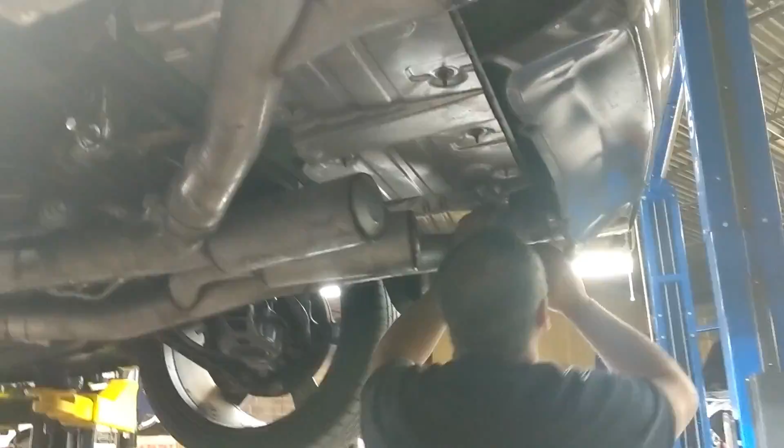So, final piece of the puzzle is the MSD Air Force intake with cam and upgraded heads. Don't focus on me, focus on him. He's talking about important stuff. I'm just moving around. We're going to take a look, see what all comes in the box.

It's a box in a box. The box in the box. I don't think it's in another box. Step one, put your box in a box. Wait.

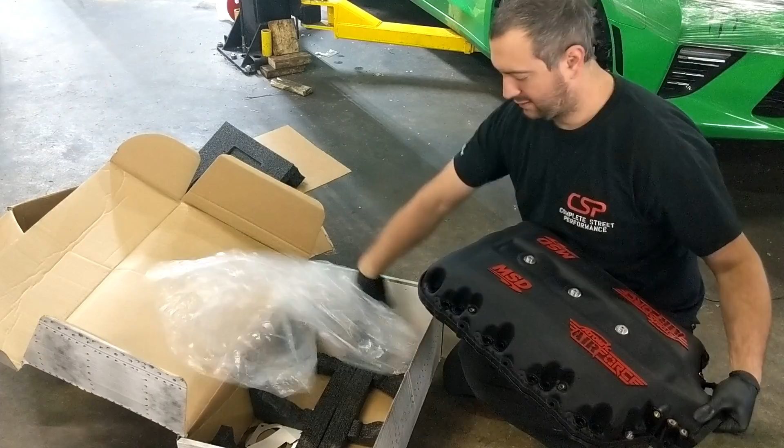That's pretty. It works better and it looks better than the factory. And we have seen decent gains over the stock intake. Yeah, it's like 20 in the high end. It doesn't lose any in the low, and it gains in the high. So now I get the fun job of transferring the MAP sensor, throttle body, stuff like that, and put it on the car. So we're going on now.

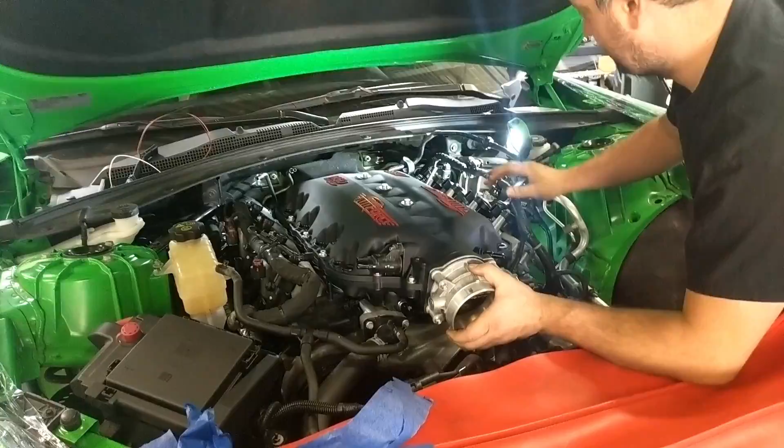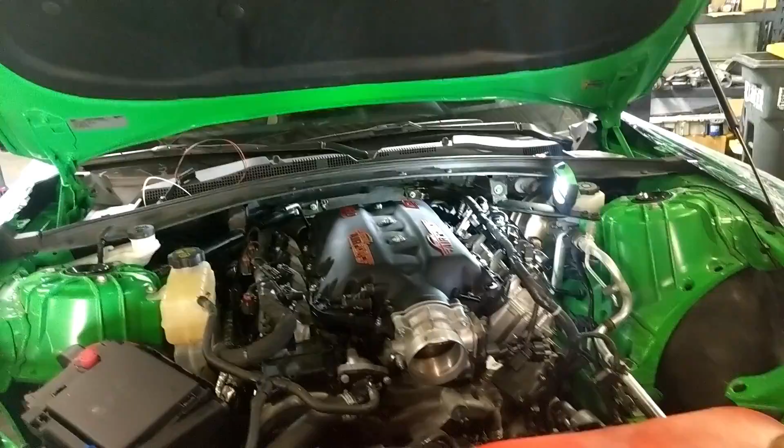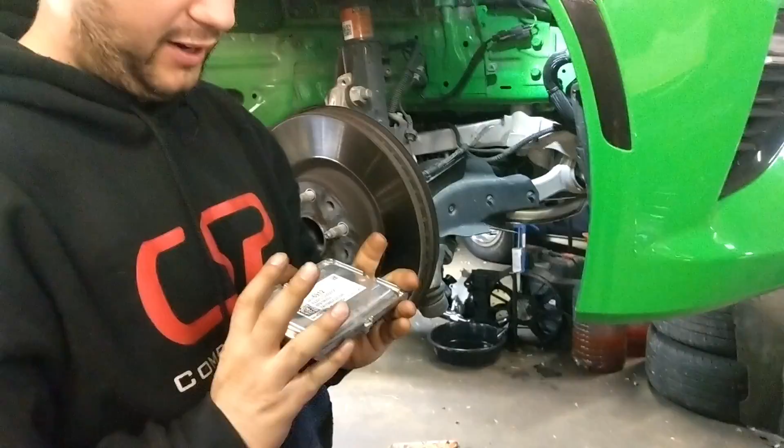Everything's swapped over. Installed. Done. MSD wants you to put blue Loctite on the bolts, so get those. But there she is. It is a decent looking intake, and it'll perform well. So all we got left is intake, fluids, and still waiting on the TCM to come back. Here, our TCM has made it back from HP Tuners. Now I'm going to put it back in. Awesome.

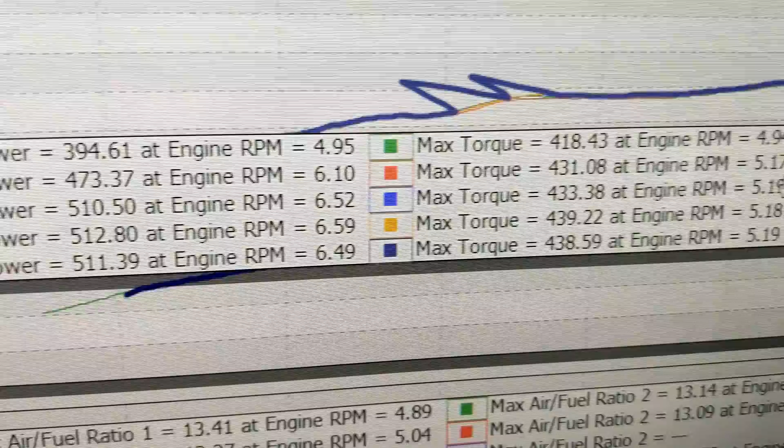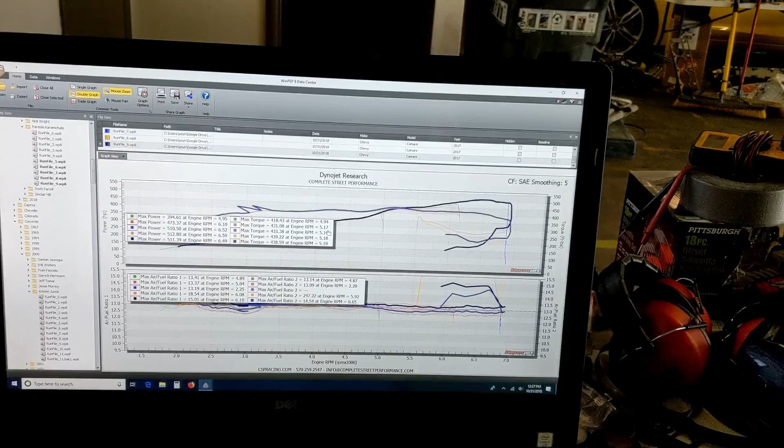She's making some good power. She's making 512, 511 horsepower, 440-ish foot-pounds of torque on pump. And on E, we usually see about a 20 to 30 horsepower increase across the board, and that would be pretty nice numbers. So we just drained the gas out using our handy contraption. And now we're going to fill her up with E85 and see what kind of numbers she's doing.

Get the logo. VP Racing. Who we're not a dealer with. But we should be. Hey, come on, VP. Yeah.

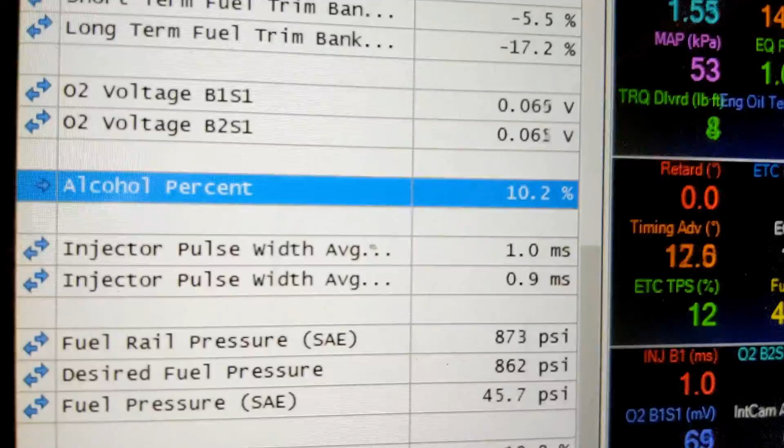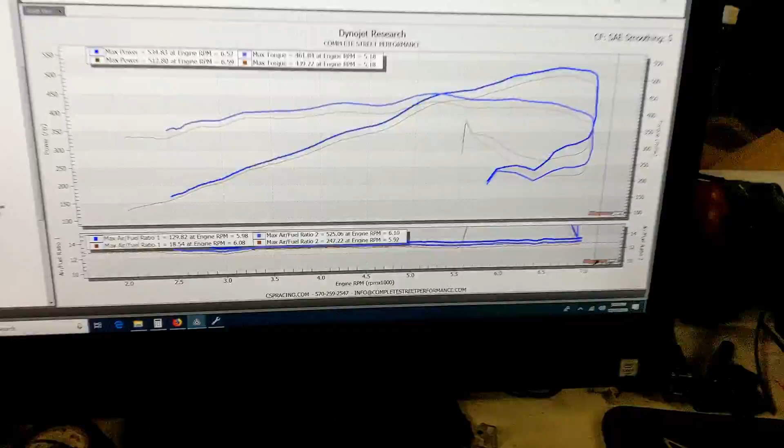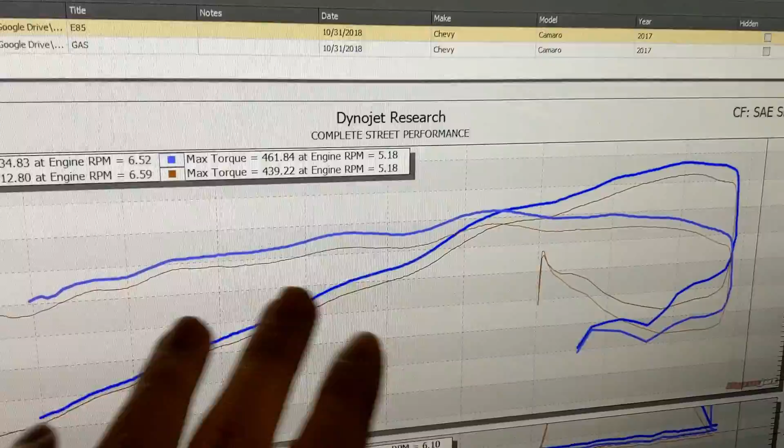And now we're going to wait for the alcohol percentage to come up. So the E85 numbers are in: 534 rear wheel horsepower and 461 foot-pounds of torque, all naturally aspirated. This camshaft's a little bit bigger, so the mid-range is a little bit lower, but wow, that's sweet. That is absolutely awesome. 534, crazy.